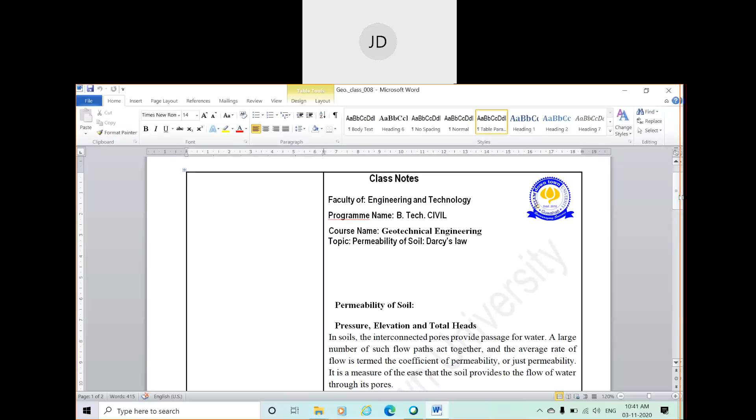So what is permeability? It's a property of soil by virtue of which it allows the passage of water or any type of fluid through its interconnecting voids in a soil mass. Okay, fine. Now let's come to here.

Now, how does water flow? Water flows due to gravity — this is already known to you, right? Now, there is a term called hydraulic gradient. I think this is also familiar to you, but anyway I just want to explain here what hydraulic gradient is.

Let me take one pen here. So suppose this is a hill, a hill area. Now suppose, as usual, water is flowing — water will flow in this direction, isn't it? But technically, what is the mechanism, what is the science behind this? You all know water flows under gravity, of course, but there is also a hydraulic gradient because of which water flows from, say, this is point A, this is point B.

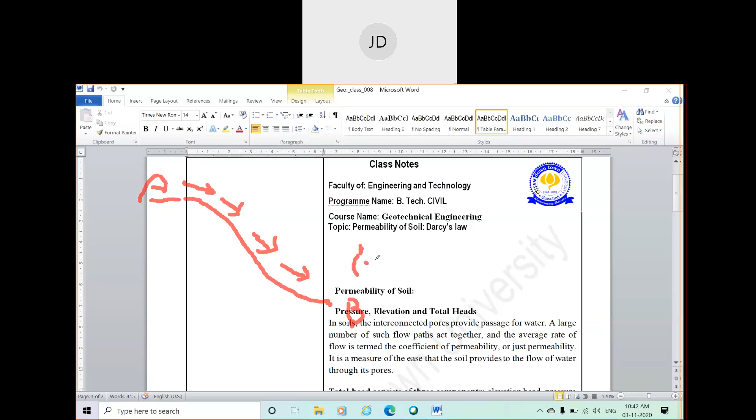Now what is hydraulic gradient? Hydraulic gradient is represented by the symbol small i, which equals the hydraulic head divided by the length traveled by the water — H by L, a ratio of H by L. Now in this case, what is H and what is L?

Let me tell you. So this is the vertical distance between A and B — let me give a horizontal line. Now the vertical distance between A and B, it is your H, or sometimes it is also known as delta H. The horizontal distance between A and B is denoted by L. I think it is clear to you. So due to this hydraulic gradient, denoted by small i, which is a ratio of hydraulic head, or sometimes given as delta H...

Sometimes also denoted as delta H. That is the head difference between these two points. And this is the length traveled by the water, the horizontal distance traveled by the water, denoted by L.

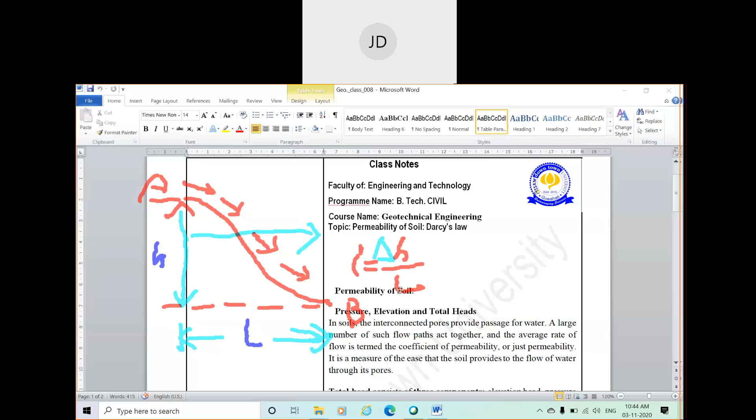This also occurs in case of soil. In general, there are three heads or three components of head for the flow of water: elevation head, which is the difference of head between point A to point B, pressure head, and velocity head. These three components of head comprise total head, and because of this total head, water flows from one point to another.

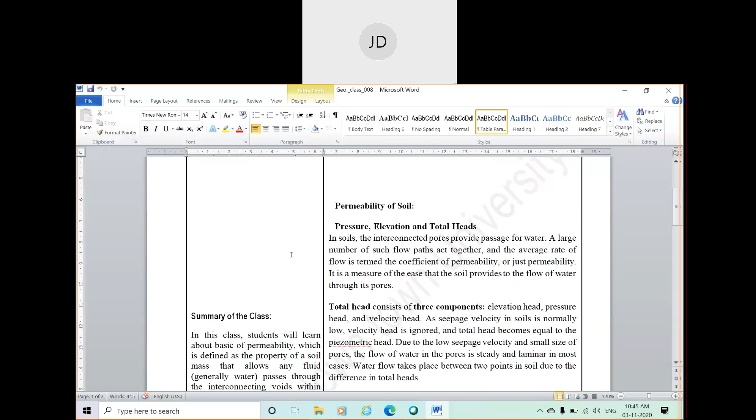Now in case of soil, the velocity head is too small, since the velocity or seepage velocity in soil is normally very low. That's why this velocity head is ignored. So for soil, when we talk about flow of water through soil, we only consider elevation head and pressure head, and ignore the velocity head.

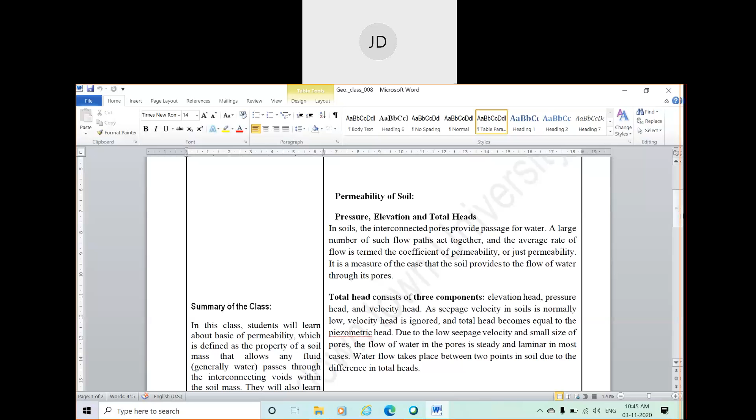Now, since we are discussing permeability, Darcy gave his unique explanation of permeability or flow of water. So as per Darcy, what is Darcy's law? I'm going to explain now.

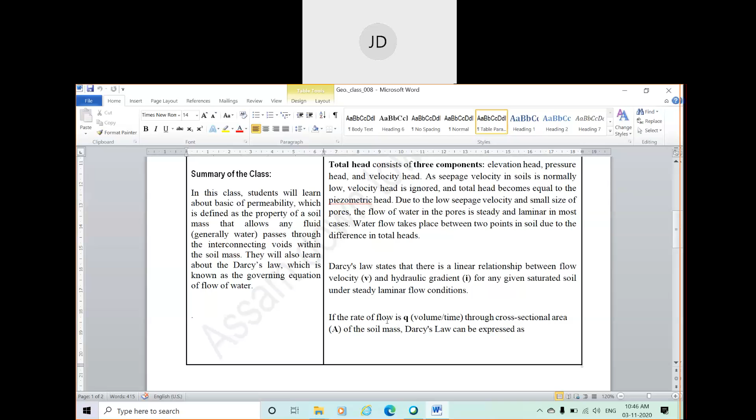Let me take one pen again. So water will flow in this direction. Since water is flowing in this direction, let me take one pen again.

Since water is flowing in this direction, as per Darcy's law, listen carefully. Darcy's law states that the rate of discharge, denoted by small q - the rate of discharge means the water flowing per unit time - flowing through a particular soil element is proportional to the cross-sectional area perpendicular to the flow, and it is also proportional to the hydraulic gradient.

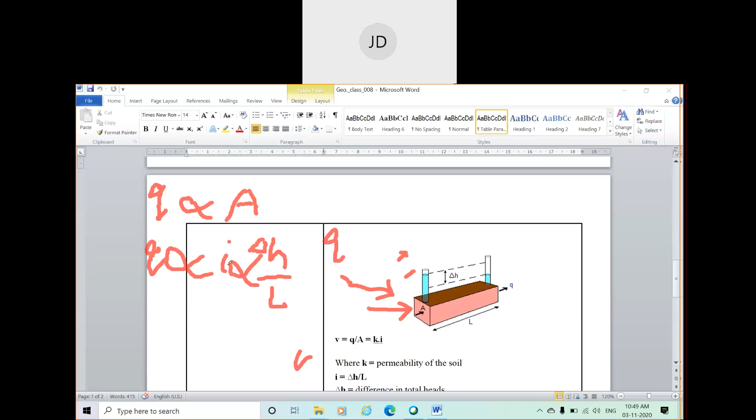So as per Darcy's law, rate of discharge is proportional to the cross-sectional area perpendicular to the flow, and also proportional to the hydraulic gradient. We can combine both these statements and rewrite that Q is proportional to I into A.

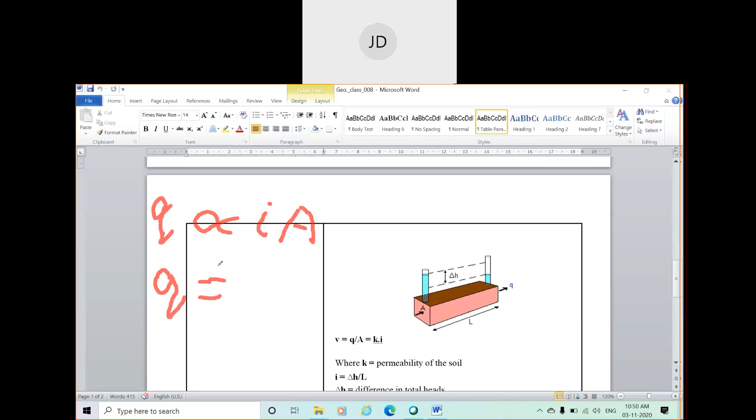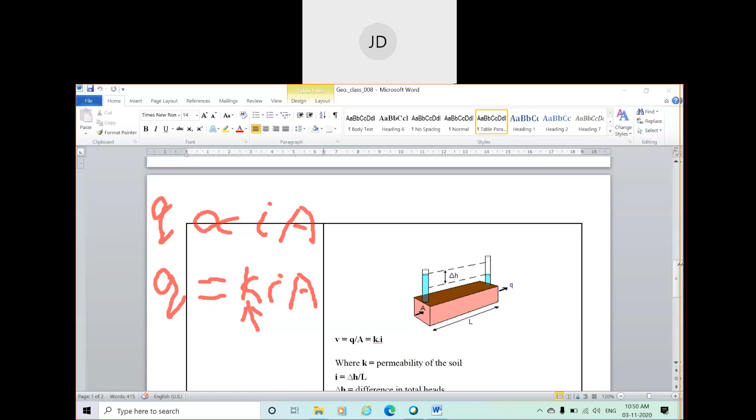Mathematically, if we replace the proportional symbol with an equal symbol, one constant term will come. Let's say the constant is k, and I into A - it's very simple mathematics. So rate of discharge is equal to K I A. Here, this k is known as the coefficient of permeability of soil.

So you can also find out the discharge or flow velocity V, as you know the definition of V or discharge. Rate of discharge is defined as velocity multiplied by cross-sectional area, V into A. So we can write velocity equal to Q by A. Now what is Q?

Q is equal to KIA. Now KIA divided by A, you will get KI simply. So we can write V is equal to KI. This is your discharge velocity or theoretical velocity of flow of water through soil, where K is your coefficient of permeability, I is your hydraulic gradient, and this is Darcy's law.

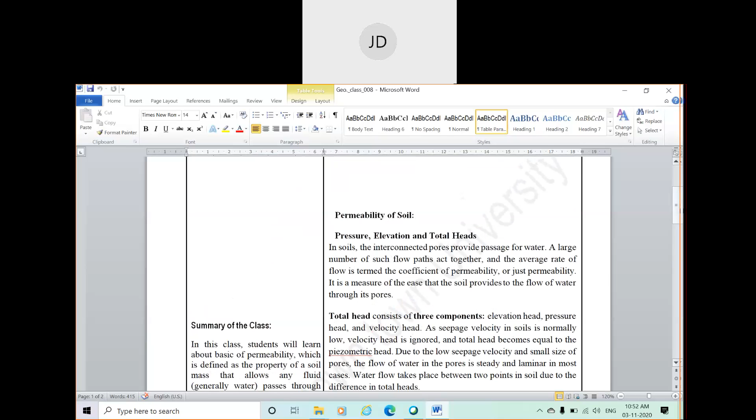You can also go through these notes to understand it better. So at the end, I want to share one last thing with you: the difference between discharge velocity and seepage velocity. There are two kinds of velocity we study in flow of water through soil. One is discharge velocity, also known as Darcian velocity or superficial velocity. The other is seepage velocity, or true velocity, or actual velocity. So what is the basic difference between these two?

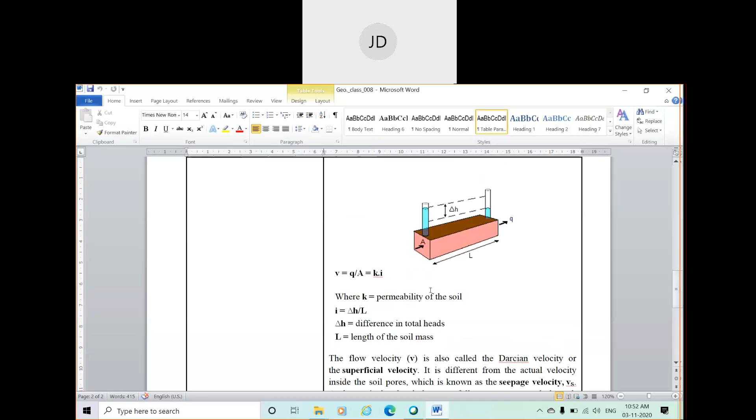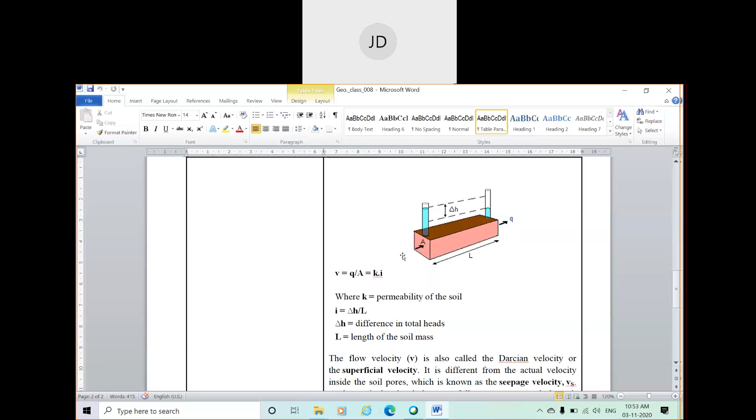When we say discharge velocity, Darcian velocity, or superficial velocity, we consider the whole cross-sectional area perpendicular to the direction of the flow, since water flows in this direction, as you can see from the arrow mark. But when we say seepage velocity, true velocity, or actual velocity, we don't consider the whole cross-sectional area A perpendicular to the direction of flow. We only consider the cross-sectional area of the voids present along this direction.

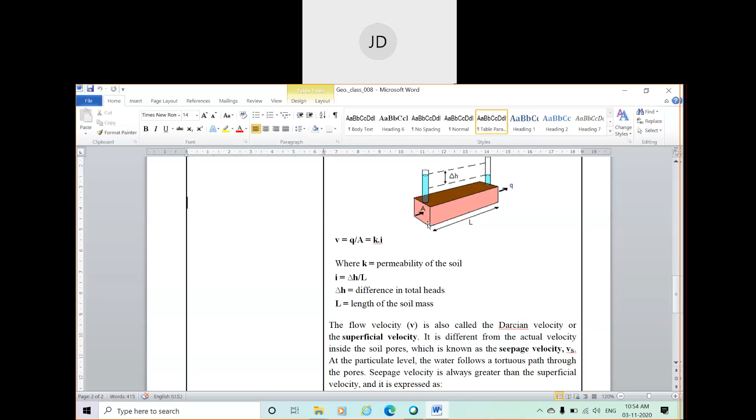Since the water actually flows only through the voids, not through the whole area. The total cross-sectional area A considers both the area of water and the area of the soil solids. But as you know, water actually flows only through the voids part, not through the solid part. So when defining seepage velocity, or actual or true velocity, we have to consider only the area of the voids, not the total cross-sectional area. So this is the difference.

So mathematically, you can say the seepage velocity is always higher than the Darcian velocity or discharge velocity. You can also go through this statement, it is very simple to understand.

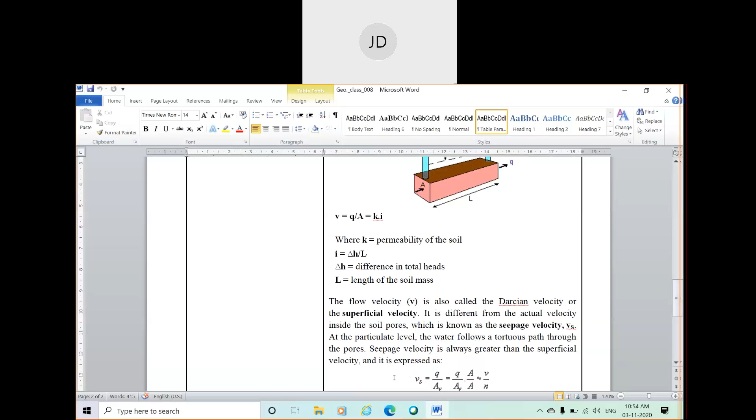There is also a relation between seepage velocity and discharge velocity. Seepage velocity is denoted by Vs. Mathematically, the relation between seepage velocity and discharge velocity is given by V by N, that is discharge velocity divided by porosity, where N is the porosity. So in a mathematical problem, if you are asked to find seepage velocity, but given discharge velocity and porosity of the soil, just divide the discharge velocity by porosity to get the value of seepage velocity.

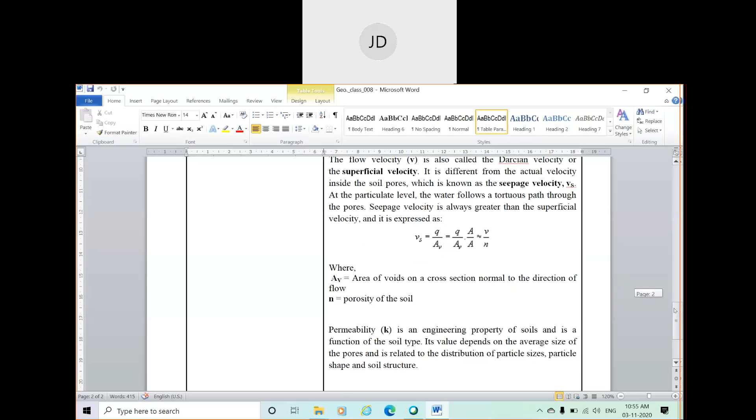So it is clear to you. This is all about today's class. This is the introduction or basic class on permeability of soil, and we have specifically discussed Darcy's law. With this, I want to conclude my class here. I just want to close my sharing now.

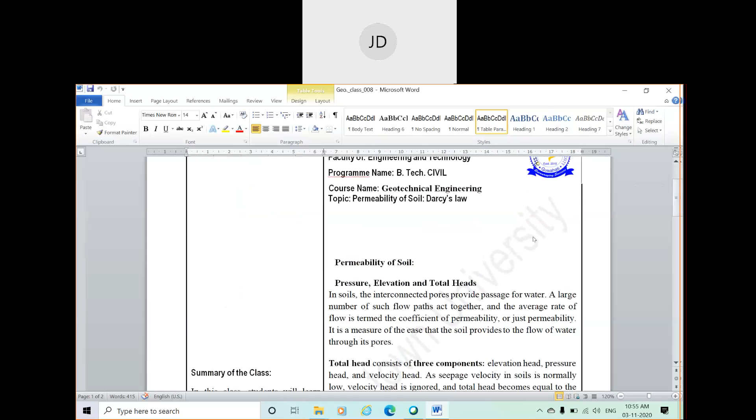Is there any doubt till now? Okay, hold on a second.